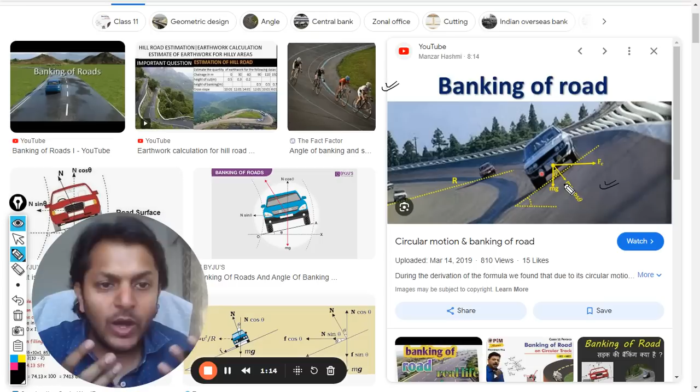Now the question is, why are we doing this banking of the roads, and what is the mathematics behind it? What role is friction playing in this? Why do we need banking of the roads? Let us try to understand that now. So first of all, when we are trying to negotiate a turn, there can be three cases that we have to study.

Point number one is when there is only friction between the tires and the road, but there is no banking of the road, and the car is negotiating a turn. Point number two, there is no friction and only banking is there. And point number three is when both friction and banking are there, which is usually the practical case.

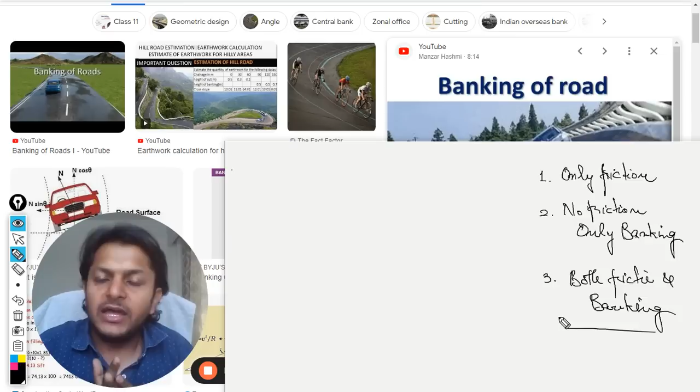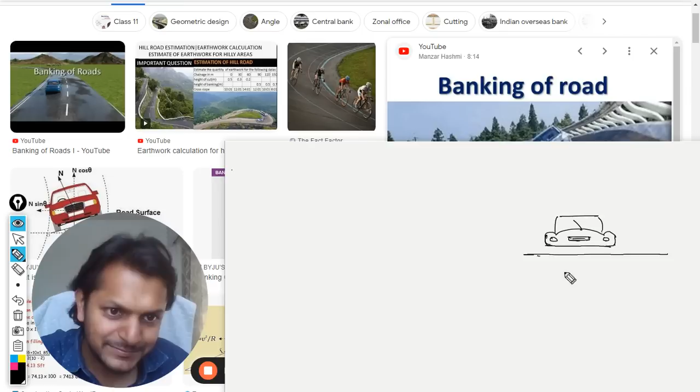These are the three cases that we are going to study to absolutely understand this topic, and you would be in a position to answer everything. Let us go to the first case when there is only friction. This is a flat surface, and there is a vehicle here. I'm not very good at drawing, but still let me try my hand. So this is the car which is trying to negotiate the turn.

I told you in circular motion, horizontal circles, whenever a body is moving in a circular fashion, some force has to act as centripetal. Otherwise, it cannot move in a circular fashion. So to negotiate this turn, some force has to act as centripetal. Now, what will be that force? In this case, number one, there is only friction and no banking. So frictional force will be providing the required centripetal force.

How? Let's say this is the car. I'm watching it from the top now, and this is the road which it is negotiating. There are two ways in which friction can act. Number one, the car is going in the forward direction, so friction will be acting in the backward direction, which will be rolling friction in this case. But we are not interested in this friction. We are interested in this friction, which is radial.

So this car is moving in this direction. This is the velocity. You are turning your steering, the wheels are turned. There is a possibility that the car will undergo drifting, skidding or slipping on the road, so that even when the wheels are turned, the turning is not taking place, but the car keeps on moving in a straight line. You might have watched the movies Tokyo Drift or Fast and Furious.

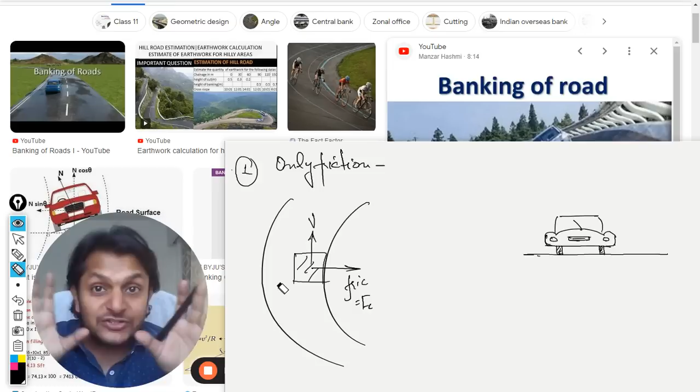Anyways, what is happening here? Friction is acting in the radial manner. This friction acting inwards is providing you with the centripetal force. The car wants to skid in the opposite direction, but it is not skidding. There is no drifting taking place, like in Tokyo Drift. So this is moving like this now. Now what happens?

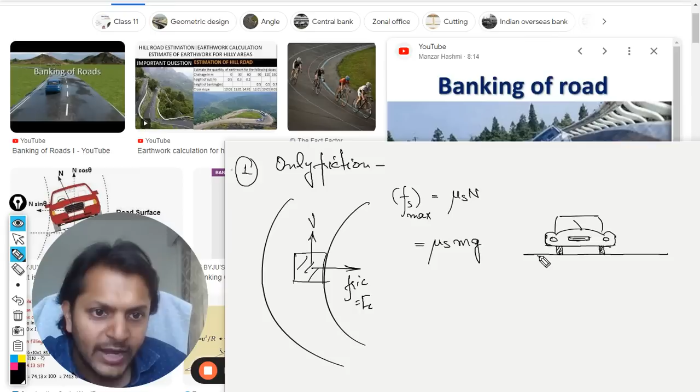Friction is like limiting friction, which is Fs max. It will be mu s into N, which will be mu s into m into g. I can show the forces in this diagram. This is the weight, this is the normal force, and this is the friction, Fs max. And the car is turning towards left only, okay, in this diagram.

So this is it, and according to our condition, the friction should be equal to centripetal. So it is mu s mg is equal to mv square by r. m and m get cancelled out. From there we can find the velocity, which is square root of mu s g r.

Now, mathematically speaking, this thing is not important for IB physics. The important thing is to understand what is happening. You can just have an idea about it. If you are not remembering these formulas, even then there is no harm. But you must know what is happening.

There have been previous year questions I've seen. They do talk about the banking of the roads. They do talk about friction becoming the centripetal force, but they are not doing this topic banking of roads in detail, but they're asking you questions. So that is why I thought of giving you the complete topic itself.

Okay, so this is the velocity with which the turning should be negotiated. This is the max velocity with which the car should be moving if you want to have this radius of turning with this much coefficient of friction between the tires and the road. If this is the case, you could be negotiating a turn with the maximum of the velocity.

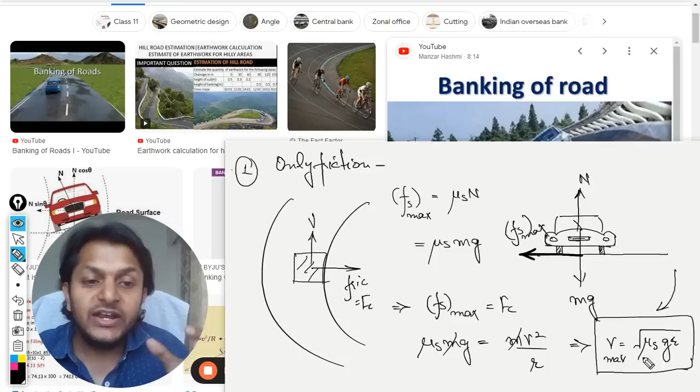But there might be chances that the friction is not sufficient. There might be chances that you need to negotiate the turn in a very small radius of turning. There might be a possibility that you are not able to reduce your velocity before you want to make a turning. What in those kind of cases? Because practically speaking, these kind of things do happen on roads.

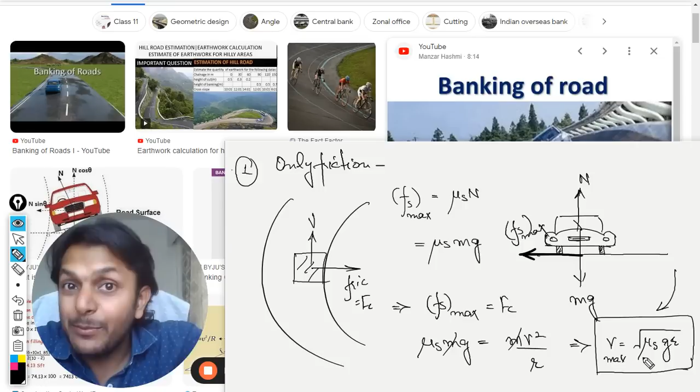So we people come up with another kind of a phenomenon which is called the banking of the road. And in this banking of the roads, we turn the roads like this. So the road is not flat now, it is inclined, and the car is literally like this. So if the car is literally like this, what to do now? Let us see.

So we are not going for this diagram here, so don't be concerned here. Only the road you have to see, this diagram that I am drawing. Now what is happening? This is theta, which is called angle of banking. Give me some time. Yeah, this is theta. So this is the mg. This is the normal reaction here.

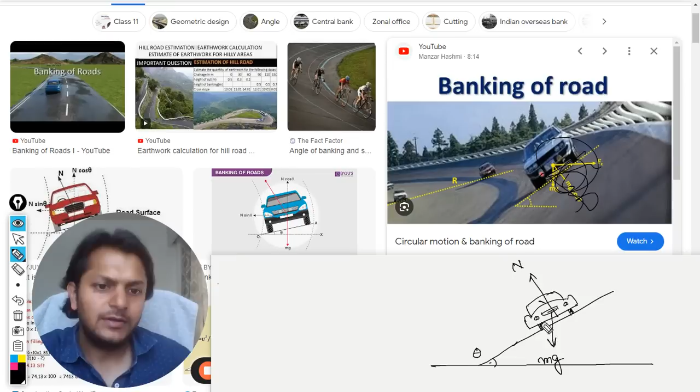And we are not considering friction. So point number 2 is no friction and only banking. And after that, I will do one more case in which we would be considering friction also. Beware, mathematics is not important, only and only understanding. Now, how the banking facilitates the turning, let me tell you. This is mg now.

So this normal reaction can be divided into components here. This angle will be equal to the banking angle theta. So the normal reaction is creating two components, N cos theta, and this is N sine theta. So N sine theta is going in a horizontal manner. We are interested in resolving all the forces in the vertical and the horizontal direction.

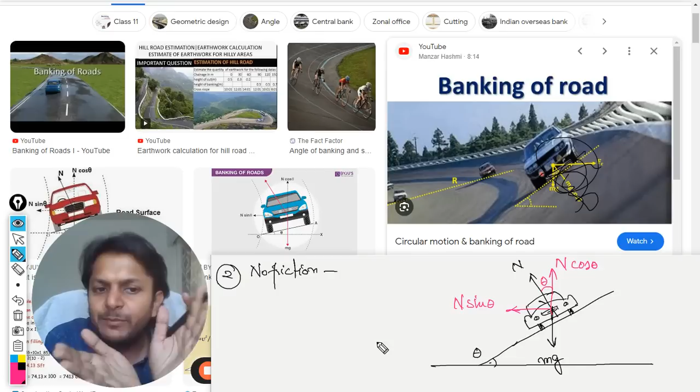So weight is already vertical, so that is why I'm not disturbing weight. But the normal reaction is at an angle, so it will be better if I create the components for the normal. This is what I've done. Clearly, N cos theta is equal to mg, and N sine theta is providing the centripetal force, which is mv square by r.

Or you can also bring in the concept of centrifugal if you understand that. So there will be a force equal and opposite, which is centrifugal, but as you might remember, I told you in my earlier videos, centrifugal forces are not treated as authentic by IB, so we can skip that. So N sine theta is equal to mv square by r.

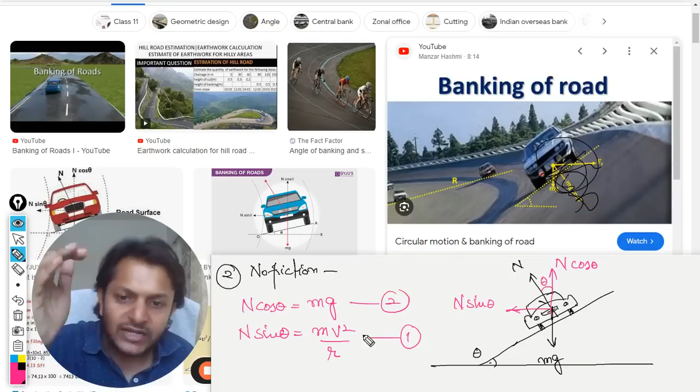From here, I am interested in theta, so I divide these two equations to find tangent theta. So when you divide these two, you would be getting something like this.

This becomes tangent theta, which is v square by gr, which means that the velocity with which you can negotiate the turn now will be given by square root of gr tangent theta. So this is the reason that banking of the road is done. It means that the car can now negotiate the turn even if the driver is snoozing and he's not even moving the steering wheel. Even then, the turn will be negotiated and the car will turn according to the road or according to the infrastructure.

Yes, so this is done in the hilly areas, to facilitate turning of the vehicle. You will not need to turn your steering too much. The turning can take place by itself. So v is equal to square root of gr tan theta. This is the maximum velocity depending upon theta with which the turn can be negotiated, even if there is no friction at all, even if you are not even turning your steering wheel. Okay, this is the essence of banking of roads.

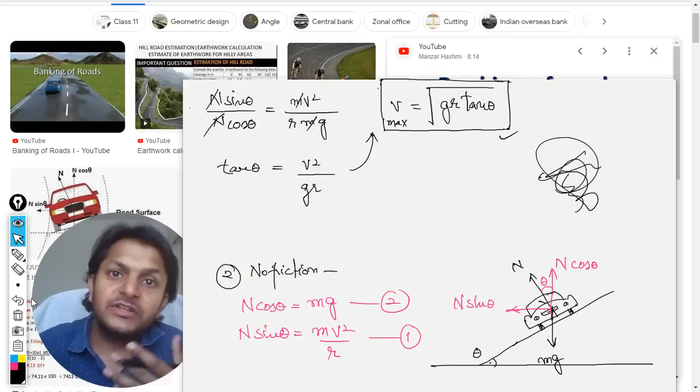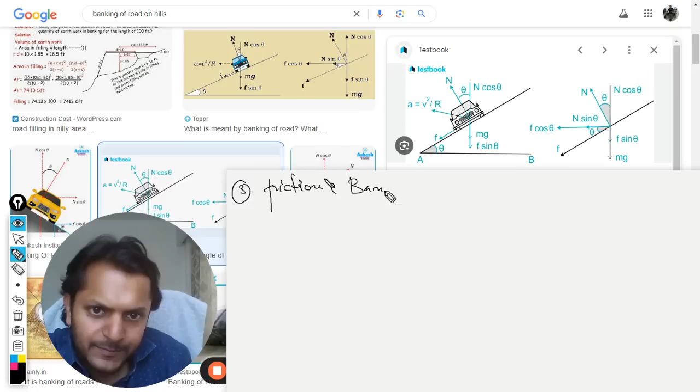So now this is it. And in this case, we can clearly see more is the angle theta, more will be the suitable velocity with which you can negotiate the turn. So these are directly proportional. Now, this is the third case when banking is there and friction is also there. So I will write friction and banking. Both are present. So let me draw the diagram here.

This is the inclined plane, and this is our vehicle. This is the angle theta, the angle of banking. This is the weight downward, mg. This is the normal reaction here, and this should be the friction which is acting between the tires and the road. So these are the three real forces which are actually acting on the vehicle now. So now we want to create the components of the various forces only in the vertical and in the horizontal. So this is the vertical direction, this is horizontal.

So now what happens? This angle theta is equal to this angle theta, corresponding angles. That can be easily proved by using 90 degrees. This angle is 90 and this is 90. This is common. So these two angles are equal, both of them are thetas. Now I'm going to create the components here. The normal reaction is creating components like this and like this. So this is n cos theta and this is n sine theta.

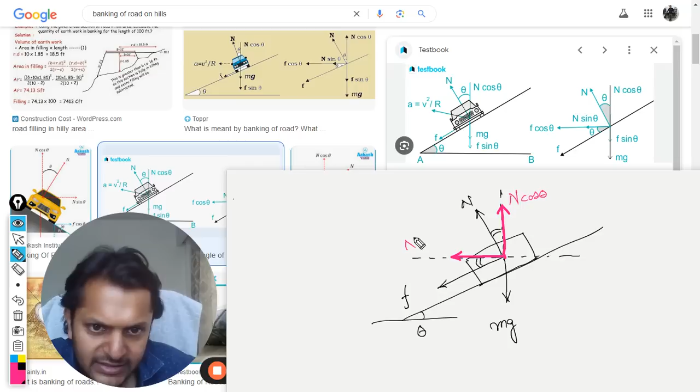Now this is friction, and we can create the components for the friction also. So this is theta. There will be this force and there will be a downward force too. So this force will become F cos theta. This will be F sine theta.

This is it. Again, telling you that the mathematics is not important for IB physics. Only understanding is important. There is one question completely based on this thing, whether the angle should be bigger or whether the angle should be smaller. Students are not able to understand things without mathematics. So there has to be a context. That is why I'm giving you this much of the mathematics. Otherwise, it's not required. You can skip learning.

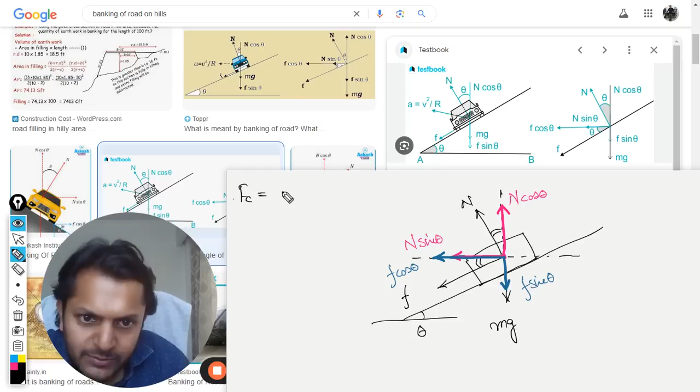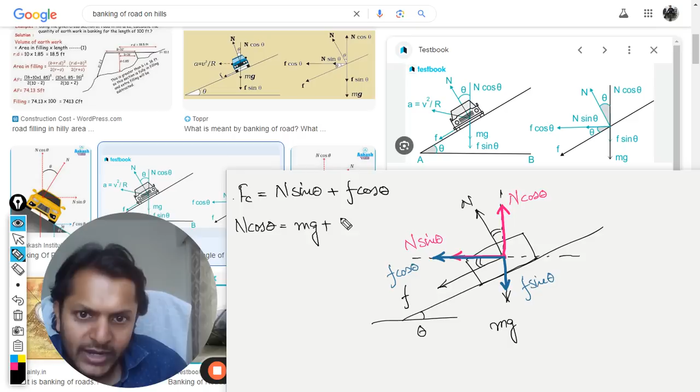Okay. Now, the centripetal force is provided by these two forces. So the centripetal force is provided by n sine theta plus f cos theta, and also the vertical forces should be equal to each other. So I can write it as n cos theta is equal to mg plus f sine theta, isn't it? So these are just like equilibrium of forces. I have equated all the forces so that the vehicle keeps on moving with a constant velocity. That's it. So this is the mathematical part.

Now, what is important for IB is who is providing you the centripetal force. So centripetal force is dependent on theta as well as on friction. More is the theta, more becomes the centripetal force, and more is the friction or the coefficient of friction, more becomes the centripetal force. So these two factors will facilitate the turning of the vehicle. That's it. This is important for IB point of view. Otherwise, mathematics is in front of you. If you want to learn, you can do this. Otherwise, you can just skip that part also. Just understanding is important.